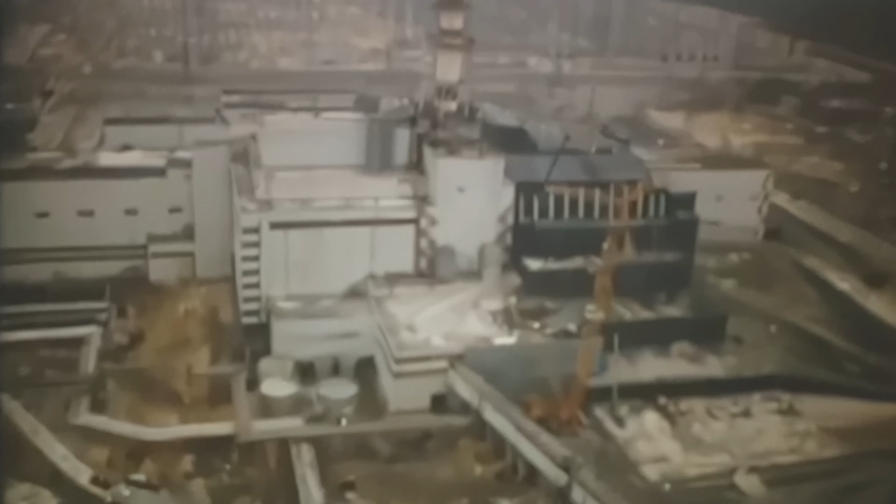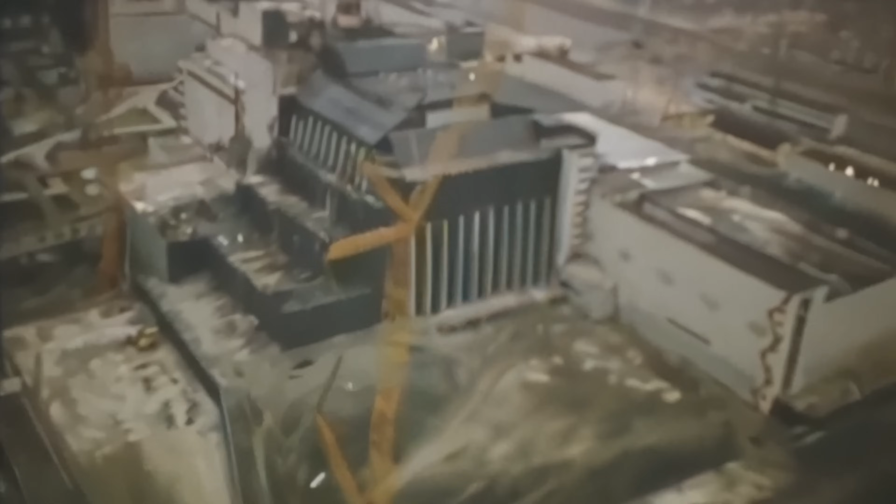In our first The False Narrative video, guided by the 1990 article Investigate Chernobyl, written by Chernobyl liquidation veterans and various nuclear power plant workers, we discussed why the Chernobyl disaster is grossly misremembered.

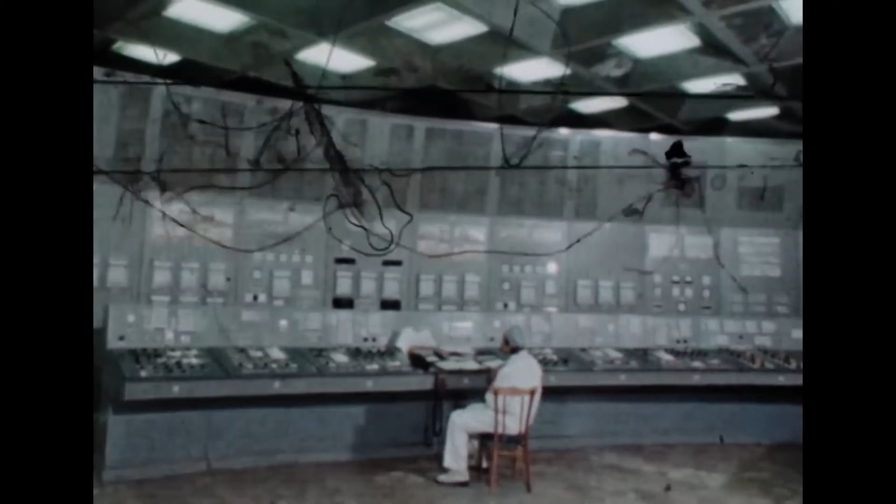In the formative months and years of the public Chernobyl narrative, Soviet nuclear power experts, without providing operating documents, portrayed the actions of reactor 4 operators as consisting of a series of severe operating instruction violations, so extremely improbable that Soviet nuclear power experts could not foresee the need to provide protection systems resilient enough to withstand such absurd behaviour.

This is literally what Soviet nuclear power experts put down in writing to the International Vienna meeting of 1986, and expressed in oral statements, including this gem found in Adam Higginbotham's Midnight in Chernobyl, the untold story of the world's greatest nuclear disaster, on page 276. Pressed by reporters on the disadvantages in the reactor design he had mentioned, Legasov replied, "The defect of the system was that the designers did not foresee the awkward and silly actions by the operators."

Most people believe the defect of the system Comrade Legasov was hiding was the positive scram effect associated with the design of the graphite displacers of the control rods.

What most people clearly don't realise is that Valery Legasov was lying about practically everything. This is where we examine the lies that Legasov popularised to ironic fanfare. Liars can be confused for truth-tellers.

Legasov was promulgating an entire crafted narrative. Its goal was to largely, if not entirely, absolve Soviet nuclear power experts, whom Legasov represented, and conversely to lay the blame on the operators.

It's important to examine this narrative because its purpose endures. The Chernobyl operators, whether represented by an individual figure like Deputy Chief Engineer Anatoly Dyatlov, or more collectively, are remembered as largely causing the Chernobyl disaster.

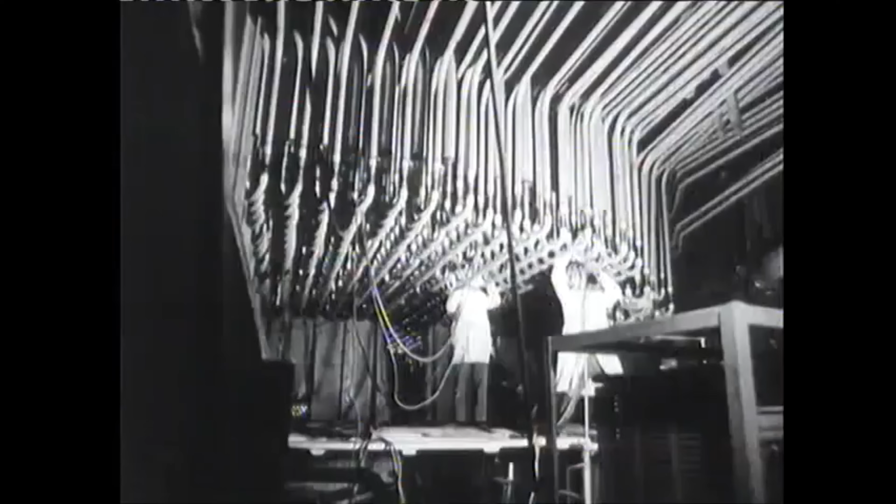We discussed the topic of the operating reactivity margin, or the number of control rods left inside the core, noting the ridiculous number of withheld and distorted details that paint a much different picture of what this parameter actually was, and how the particular operators in the control room on the night of the 25th into the 26th of April 1986 treated it.

We highlighted that the actual number of control rods present in the reactor core when that number mattered to the initiation of the disaster is actually unknown, and was certainly higher than the 6 to 8 figure Soviet experts managed to sneak past most. It is possible that the reactor was destroyed with an ORM within regulation.

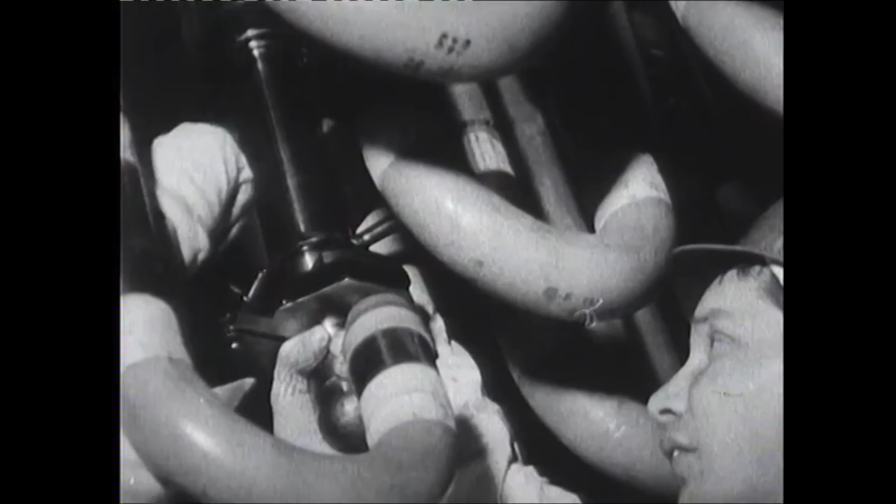Next, we move on to discuss the rest of the salient points of the Soviet expert narrative that they themselves chose to feature. But before we do that, let us address something.

Some of our viewers are wondering who we are, why we should be trusted. We aren't experts of any sort. We have no background in nuclear energy or even engineering more broadly. Who we are is literate and ironically patient, two qualities that are necessary to sort through lies. Doubting us personally is one thing. Doubting our sources is another altogether.

Here we have a viewer who derisively puts our sources in quotation marks. This perceptive specimen has apparently read the video description we ourselves wrote. He notes that there are multiple links in it, but only because they lead to the same article text in different formats. Indeed, we see the multiple links to the article text we are explicitly following in this series of videos.

There is, however, another link in the description. This is a 178-page paper, long enough to be a book, we've been told, containing 432 citations at present. The author found doing a bibliography unnecessary, so a reader has to settle for all the direct references.

Following a 3-page introduction, the first section of this paper is called Lies. It goes from page 4 all the way to freaking page 54. By the time you get to the end of this section, you're in 146 citations deep, or 14.6 inches for anyone who doesn't catch our drift.

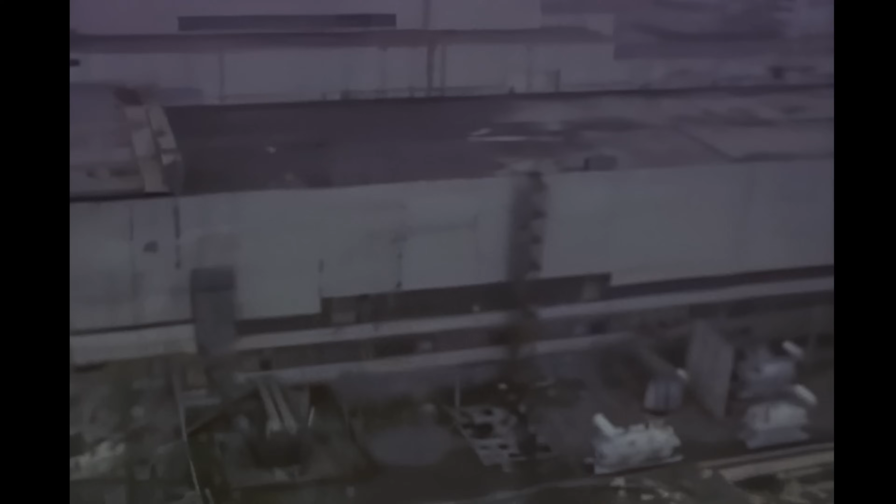Anyone who is dissatisfied with the lack of prominence, pertinence, authority, expertise, or whatever else of these sources should seek the professional help we quite simply cannot give. Maybe plainly difficult, or another YouTuber has supreme qualifications that supersede those of the people involved in our sources. At that point, you might as well ask them if they're related to Jesus, and when this world's climax is coming. And so, with profound disappointment, we go back to discussing the article that is underwhelming our viewers.

In this video, we shall limit ourselves to discussing the half-truths of Chernobyl. Allegations 2 and 3, made by Soviet experts against the operators, are notable for being able to be read as truths. The article authors immediately acknowledge this.

The operators did lower the reactor power beneath the 700 to 1000 megawatt range written in the testing program. In fact, they initially did so intentionally. It's the context where things diverge dramatically between the Soviet expert narrative and the truth.

In operating instructions and regulations, there was no such thing as a restriction on operation of an RBMK reactor under 700 megawatts before the Chernobyl disaster. In fact, the article authors show multiple examples where the operating instructions explicitly called for reactor operation under 700 megawatts.

Explicit permission to operate under 700 megawatts and lack of any restriction on operation under 700 megawatts is found in INSAG-7 as well. Then the article authors point something out that INSAG-7 at most leaves implicit: the 700 megawatt power figure found in the testing program was written there by the operators themselves. They were the authors of the testing program.

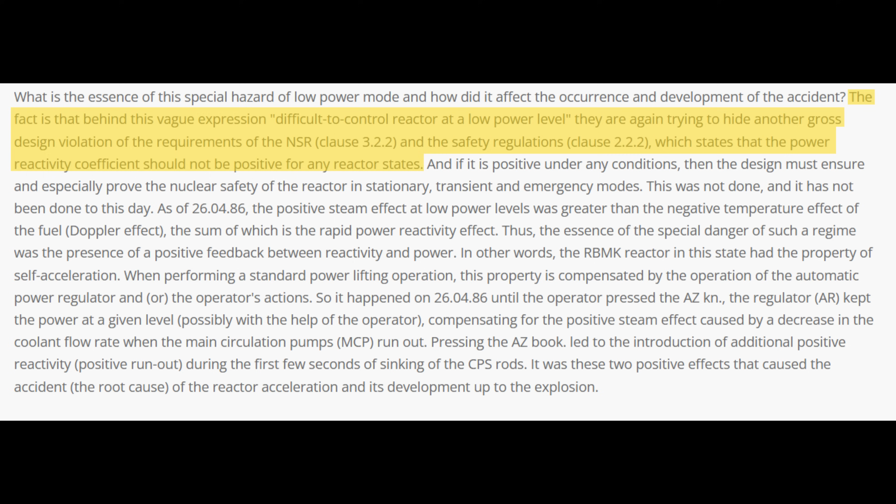The vague expression of difficult to control reactor at a low power level that Soviet experts put down in writing was subsequently fleshed out into being the presence of a positive power coefficient of reactivity, or the reactor being able to accelerate. How do we know this for sure?

Maybe the article authors are unreliable. Behold the Safety Series number 75, INSAG 1, summary report on the post-accident review meeting on the Chernobyl accident, report by the International Nuclear Safety Advisory Group. This is the IAEA report that resulted from the 1986 Vienna meeting and subsequent in-person discussions between Soviet and international experts. Now watch this. Page 3.

The net effect of a power change depends upon the power level. At 700 megawatts, the net effect turns positive, and therefore operation of the reactor below 700 megawatts is restricted by operating procedures. That's at the beginning of the report.

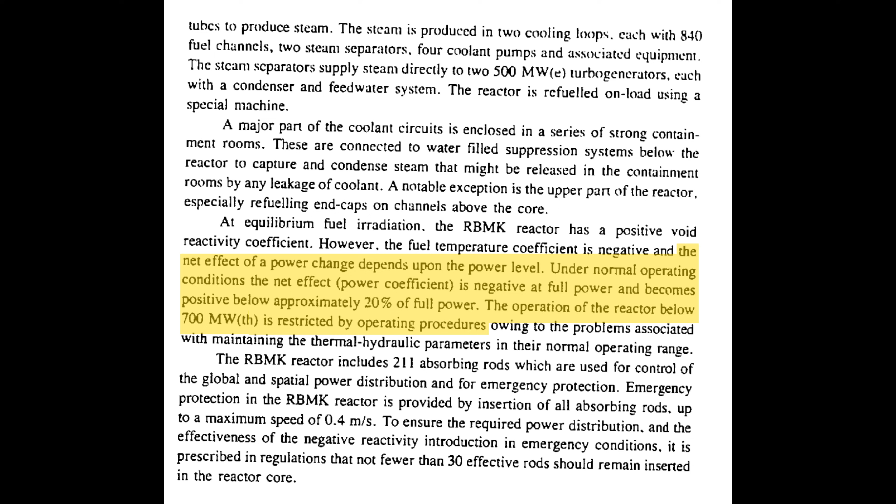Maybe by the time you got to the end of it, you hit your head and forgot about the single most important thing: the reactor being able to accelerate. Not to worry. Here's page 77 of the General Observations and Provisional Conclusions section.

At the very first safety level of reactor design is inherent stability. What the hell does that mean? It means not having a positive power coefficient, signifying the reactor can accelerate. There's that net effect term again.

Again, the report states the net effect becomes positive under 700 megawatts, and the operating procedures restrict operation under 700 megawatts. But let's say you're really special, and you want some meat between the top and bottom buns of the report. No problem. This is a Swiss sandwich of disaster, meaning the crap is there throughout.

Here's page 29, where we learn that 700 megawatts is a level set to avoid the reactor being operated in a condition where an increase in power results in a still larger power rise. Here's page 15: continuous operation below 700 megawatts is forbidden by normal safety procedures.

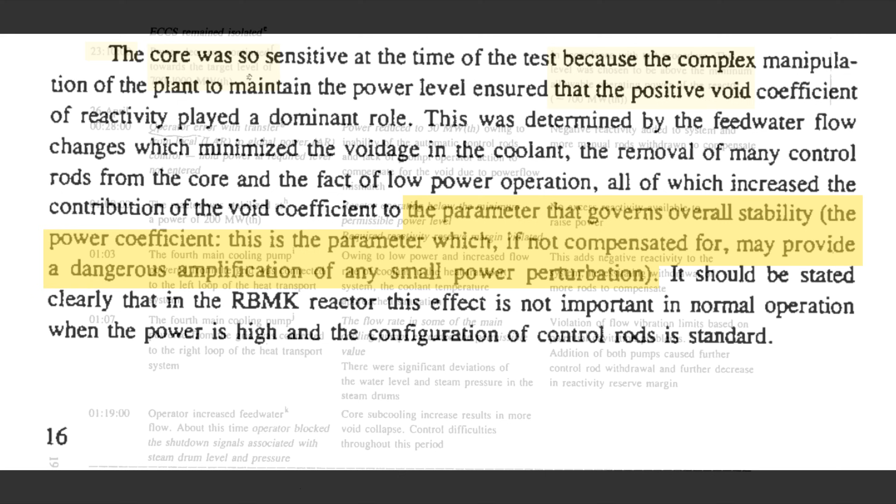Here's page 16, where we have the power coefficient defined as the parameter that governs overall stability, and where Soviet experts were apparently trying to hedge their bets, aided and abetted by international experts, which is a tangent we'll go on later. Here's page 19, where it is explicitly stated that the 700 megawatt power figure found in the testing program was merely chosen in reference to the power restriction of operating the reactor altogether.

There are two giant problems with all of this. Here is the bottom of page 10 and the top of page 11 of INSAG 7, the later International Atomic Energy Agency report, in which we learn that nuclear experts can do it all, from building to exploding nuclear power reactors. Except use the 3 to 4 letter word: lies.

So it turns out this claim, repeated again and again in the INSAG 1 report, regarding a minimum level of continuous reactor operation existing at 700 megawatts to prevent the presence of a positive power coefficient of reactivity, was based on oral statements made by Soviet experts during the week following the Vienna meeting. That's rich. But in fact, and what Soviet experts left vague in writing, there was no such restriction in operating instructions and regulations. Now, how can that be?

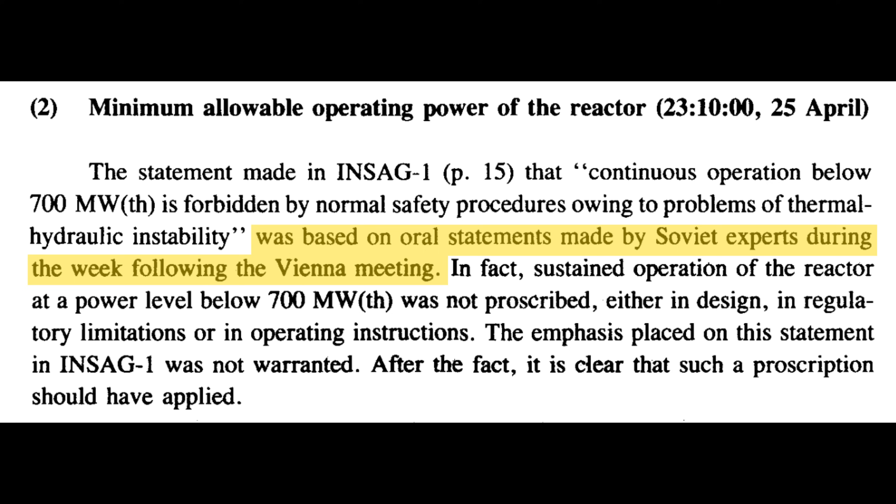Let's scroll to page 36 of the same report. The first half discusses the high positive void coefficient, whereas in the second to bottom paragraph, it mentions the positive power coefficient. This paragraph states that measurements indicated there was a positive power coefficient of reactivity, or a self-acceleration property, at power levels greater than 1600 megawatts.

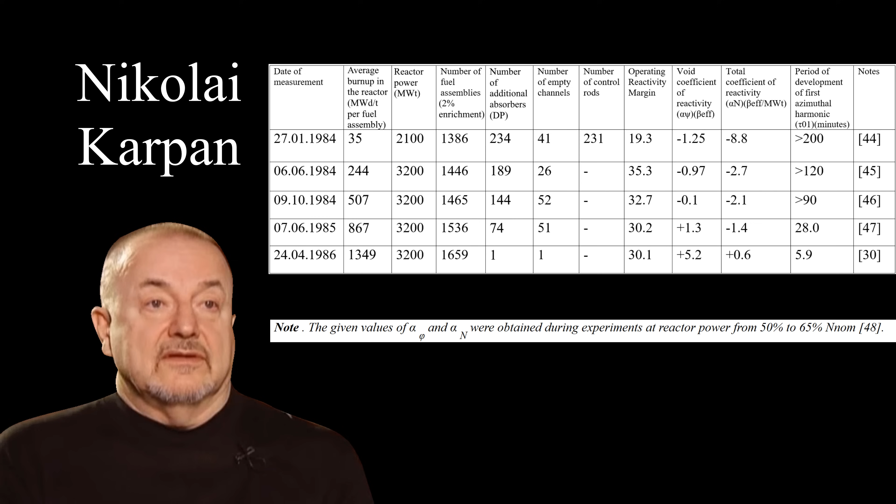This strangely terse statement is a reflection of Deputy Chief Engineer for Science and Nuclear Safety of the Chernobyl NPP at the time of the disaster, Nikolai Karpan's table, which shows a positive power coefficient appearing not in association with low power or the number of control rods present in the core, but in association with high fuel burn-up and the removal of additional absorbers as mandated. So yeah, that ain't good. Even more so than the operating reactivity margin control rods fiasco, this may be the biggest lie of Chernobyl.

Yet, how often do you hear anyone even mention such a thing as a power coefficient of reactivity? It's usually her, positive void coefficient of reactivity, because cheap.

Anywho, here's the great wall of text the article authors decided it was a good idea to present in writing on the third violation allegation levied against the operators by Soviet nuclear power experts. You wouldn't put a baby to sleep reading this. You'd kill it dead in its crib.

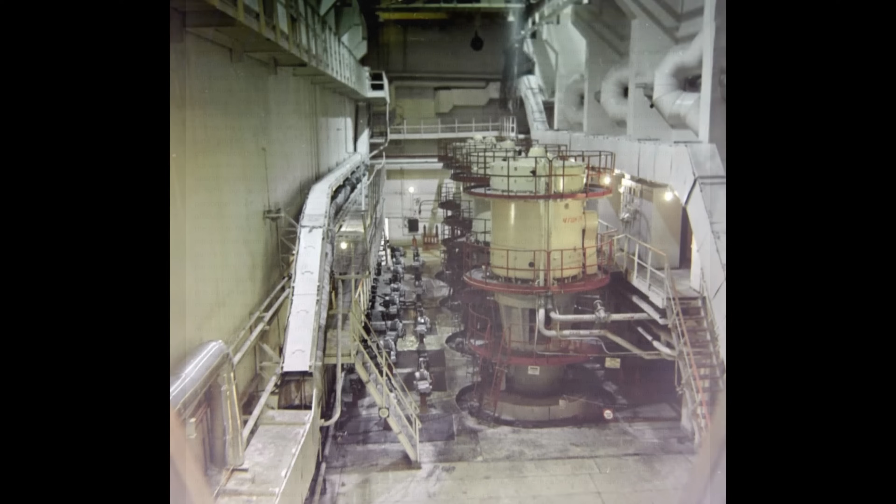But we digress. The article authors claim that the official wording of this violation allegation is connection of all MCPs to the reactor with excess of costs for individual MCPs established by the regulations. MCPs stand for the main circulation pumps providing coolant flow to the reactor core.

Let's underscore the weirdness of this wording by referring to the actual 1986 Soviet report to the Vienna meeting, which includes a comma for further strange delineation. Connecting of all the main circulation pumps to the reactor, with individual pump discharges exceeding the levels specified in the regulation. Do you see how within what is supposed to be a violation, there is an actual explicit violation? We call this the 2-for-1 Soviet bundle, where you gain remarkably less than you bargained for.

How? Let's return to the article. The consequence of the 2-for-1 Soviet bundle supplied by Soviet nuclear power experts is the temperature of the coolant being close to boiling throughout the circulation loop. The article authors immediately point out that the connection of all main circulating pumps to the reactor at any power level before the disaster was not prohibited. As with the power level, a restriction appeared only after the disaster.

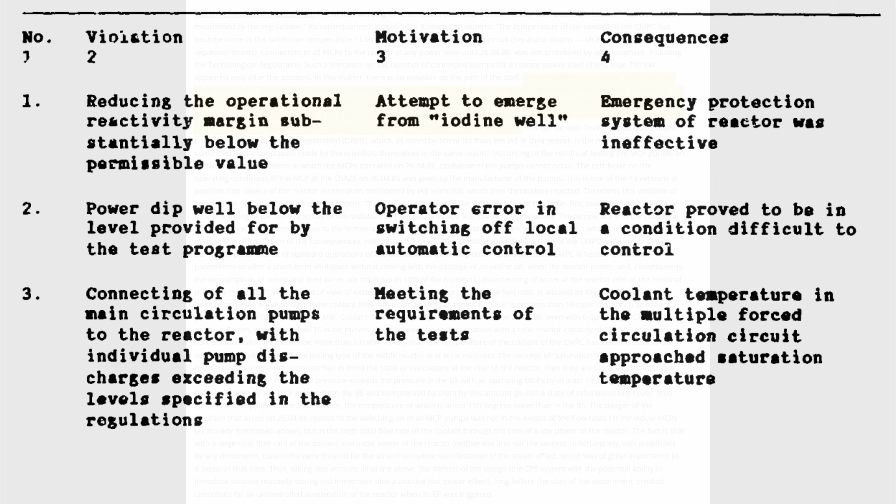There was indeed a violation in the flow rates of individual main circulating pumps, the part after the comma. However, such a violation was associated with the phenomenon of cavitation, which, as far as we can tell, has something to do with steam bubbles. Regardless, the potential consequence of this violation meant that the coolant supply coming from individual pumps could be disrupted. As the article authors point out, referring to scientists at the Kurchatov Institute of Atomic Energy writing their own reports, cavitation and disruption of coolant supply did not occur.

This was an important topic to consider, as it was floated as a potential cause of the Chernobyl disaster, but objectively dismissed as such. The main circulation pumps simply kept working.

Again, we find the parallel of this in the INSAG 7 report at the bottom of page 77. The paragraph explains that the connection of all MCPs was a part of the testing program and operators violated no documents in following through with this action. There was a violation in the individual MCP flow rates, but this did not result in cavitation and the pumps worked without disruption.

So, the actual violation of excessive individual MCP flow rates was not a root cause of the Chernobyl disaster. But Soviet nuclear power experts were clever and did not list cavitation as the proposed consequence of a violation. Instead, they listed the temperature of the coolant being close to boiling as the significant consequence of a violation. The temperature of the coolant being close to boiling at the reactor core inlet is something we see in INSAG 7 as well. But not only did Soviet nuclear power experts deceptively bundle the inconsequential violation of excessive individual MCP flow rates with the non-violation of connecting all MCPs, they did not admit the coolant being close to boiling was a natural state of RBMK reactors, that was furthermore acknowledged in operating instructions.

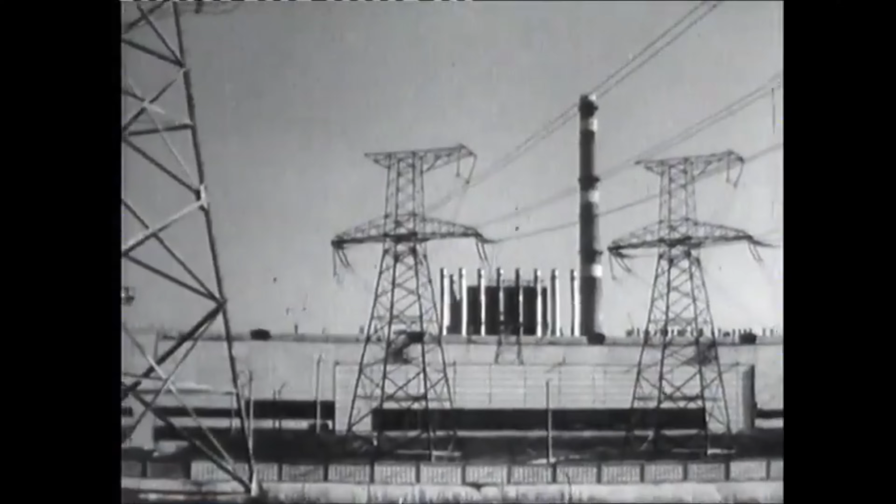This inevitable RBMK reactor state of minimal or even zero subcooling, or the coolant being close to its boiling point, is actually acknowledged in INSAG 7, bottom 2 paragraphs of page 64. The thermal hydraulic operating conditions of the core were characterized by low level of subcooling of the coolant below the boiling temperature, 3 degrees Celsius, and a correspondingly low steam quality, which was observed only in the upper part of the core. Under these circumstances, in view of the low level of subcooling of the coolant below the boiling temperature, a small power increase, for whatever reason, could result in a much higher increase in the volumetric steam quality in the lower part of the core than in the upper part.

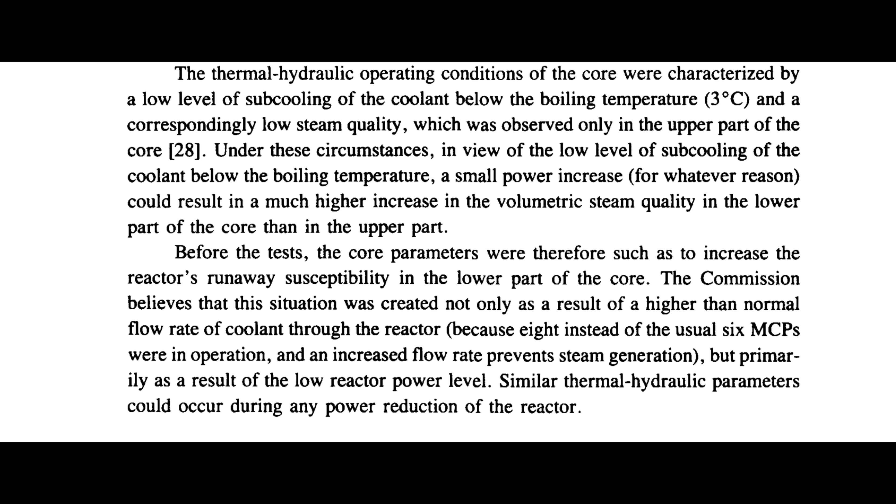Before the tests, the core parameters were therefore such as to increase the reactor's runaway susceptibility in the lower part of the core. The Commission believes that this situation was created not only as a result of a higher than normal flow rate of coolant through the reactor, because 8 instead of the usual 6 MCPs were in operation, and an increased flow rate prevents steam generation, but primarily as a result of the low reactor power level. Similar thermal hydraulic parameters could occur during any power reduction of the reactor.

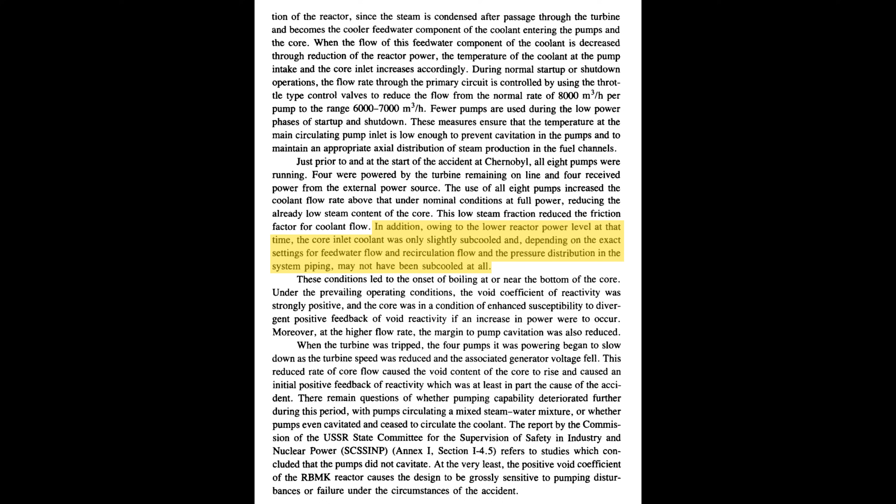Even the doofuses writing the opening international section of INSAG 7, who try their best to correct blatant falsehoods while preserving what threads they can to blame the operators, discordantly include the following sentence on page 8: In addition, owing to the lower reactor power level at that time, the core inlet coolant was only slightly subcooled, and, depending on the exact settings for feed water flow and recirculation flow and the pressure distribution in the system piping, may not have been subcooled at all.

The international dipsticks don't include the connection of all MCPs and the total flow rate in their stunning list of corrections in subsection number 3, ironically called the accident. The accident here being that Soviet nuclear power experts clearly created an entire false narrative, rubber-stamped and promulgated by international experts in INSAG 1. On page 18, however, they acknowledge the corrections the Annex 1 section makes.

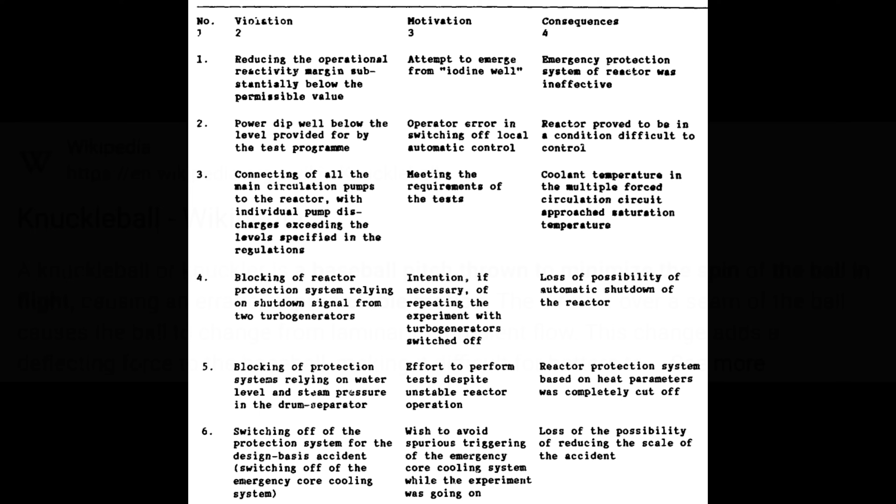So, what's the takeaway? Soviet nuclear power experts were throwing a knuckleball, or something, a pitch that moves in the air. Wikipedia defines a knuckleball, or knuckler, as a baseball pitch thrown to minimise the spin of the ball in flight, causing an erratic, unpredictable motion. Sometimes you just toss a dead ball and let the spin occur in the batter's mind.

These masters of deception just combined the non-violation of all MCPs being connected with the inconsequential violation of individual excessive MCP flow rates, that they even tipped everyone off to with their use of a comma and specifying a violation within what is supposed to be a violation, and married all that with the consequence of the water being close to its boiling point that was actually a normal state in an RBMK reactor, acknowledged by the operating instructions they did not provide to the Vienna meeting.

How do you like them apples? Do you know who likes apples? Janez Prograd. Now, Janez, on the 14th of April 2025, Control-F'd Xenon in INSAG 7, posted several results, and concluded that we are full of shit. For some reason, Janez also decided to involve episode 5 of the HBO miniseries into this, to which we counter with like a 4-hour analysis of episode 5 with plenty of INSAG 7 quotes.

That aside, Janez's collection of INSAG 7 quotes is considerable, for it does make the video they are posted under kind of look like it's full of shit.

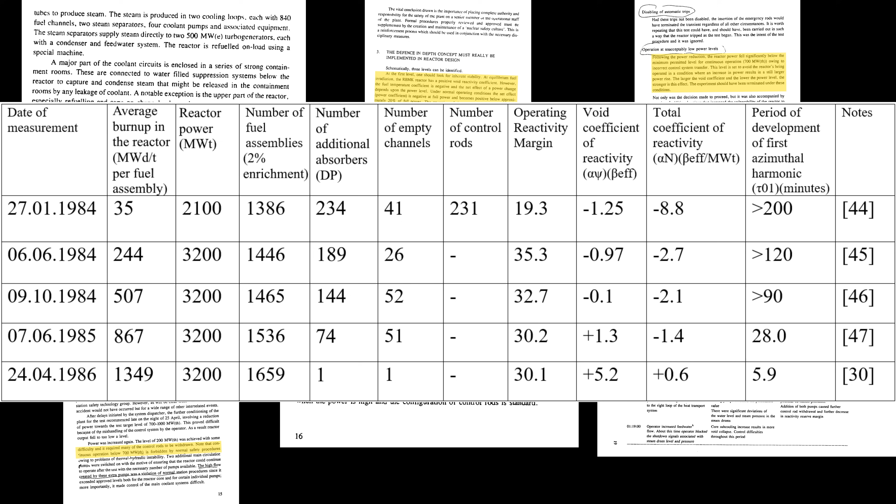Remember how we just talked about the paramount safety importance of there not being a positive power coefficient of reactivity, because that meant the reactor could accelerate. And remember how Soviet experts lied that under 700 megawatts was when there was a positive power coefficient, and that, of course, general reactor operating instructions forbade continuous operation under this power level. This ORM nonsense in the international section of INSAG 7 is just a continuation of those lies.

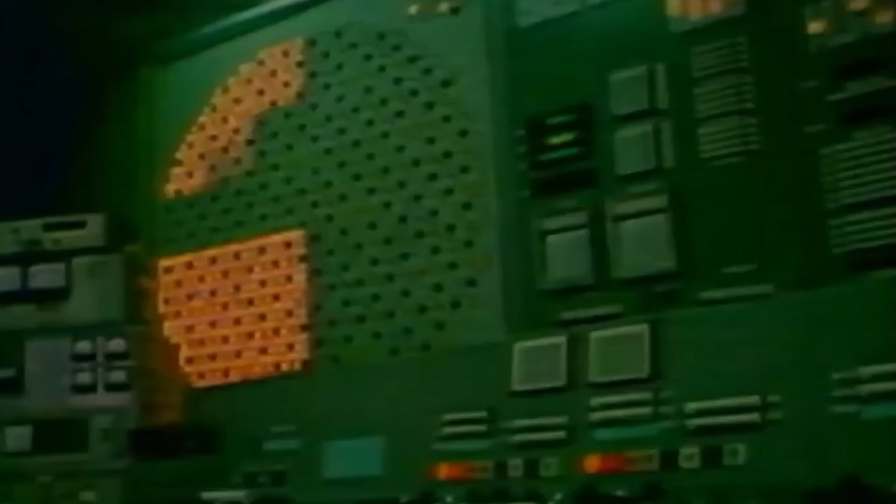Obviously, INSAG 7 corrects and refutes most of the INSAG 1 false narrative that Soviet experts fed and manipulated. But rather than INSAG 7 writing 'oops, we effed up,' nuclear power experts just couldn't help themselves but continue to be clever. So, with everything almost corrected, one of the few remaining things to blame on the operators was the operating reactivity margin, or the number of control rods remaining in the core. INSAG 7 uses the well-known 6 to 8 rod figure.

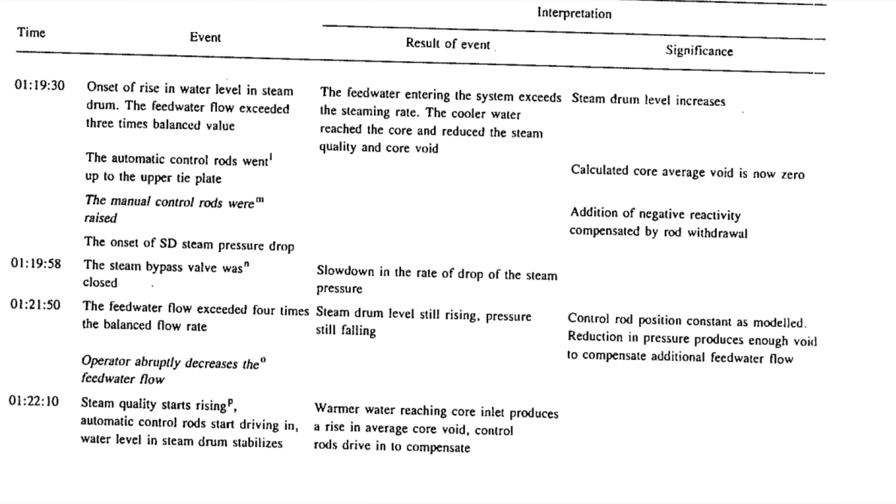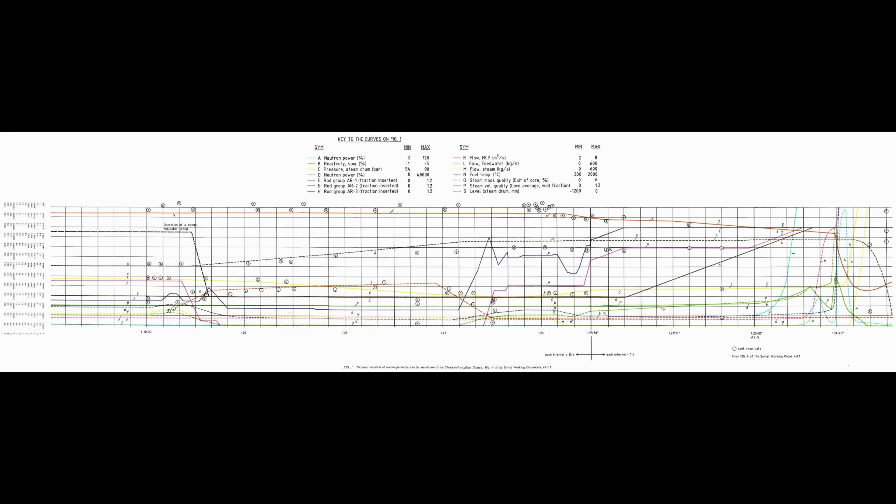Ironically, if you were to look at the timeline found in INSAG 1, you'll see a description of control rod movement associated with feed water flow changes starting from about 1:19. This movement shows the ORM changing, more than that, increasing the closer you get to the actual disaster. Furthermore, there's an entire graph or chart including rod movement prior to the pressing of the AZ5 button that clearly reveals the transient nature of the 6 to 8 figure that was not current when the button was actually pressed, and hence when the ORM actually mattered.

The figure was invalid. The ORM was higher than that, possibly as high as complying with regulations. When you look at the timelines in the INSAG 7 report, you'll find no mention of these feed water flow changes and their effect on ORM. Now what's up with that?

In this vein, the international section of INSAG 7 picks up the discredited mantle of blaming the operators for the positive power coefficient of reactivity, and puts it on the ever-broadening shoulders of the operating reactivity margin. Yet, the same as Janez Prograd, the authors of the international section of INSAG 7 apparently never laid their eyes on page 36 of their own report.

This page reveals that, along with the power level argument, the ORM being responsible for the positive power coefficient is nonsense. The excessively high positive void coefficient of 5 bananas was associated with an authorized operating reactivity margin twice as high as the minimum of 15. This high a positive void coefficient was in turn associated with a positive power coefficient. In other words, if you're just Control-F'ing stuff in INSAG 7, you can still be the one full of shit. Happy Chernobyl week.